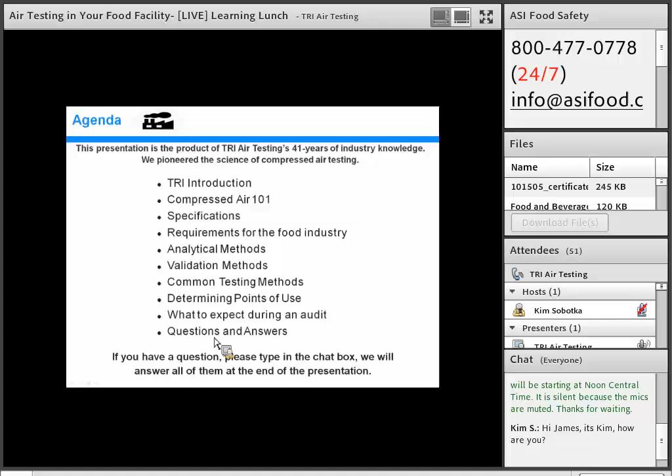So TRI has been around 41 years. There's a saying I love, it says, "Why trust the knowledge of a brickmaker about jewels?" It's from a book called The Richest Man in Babylon. Just means, you know, get advice from people who actually know what they're talking about, right? You're not going to go down to a jeweler and ask him to build you a house. You're not going to ask a brickmaker to advise you on what diamond ring to buy for your fiance, at least not if you want to end up married to her.

Same thing with air testing. There's a lot of misinformation out there, so hopefully we'll be able to plow through and kind of debunk some of that and give you guys some good guidance at which way to go.

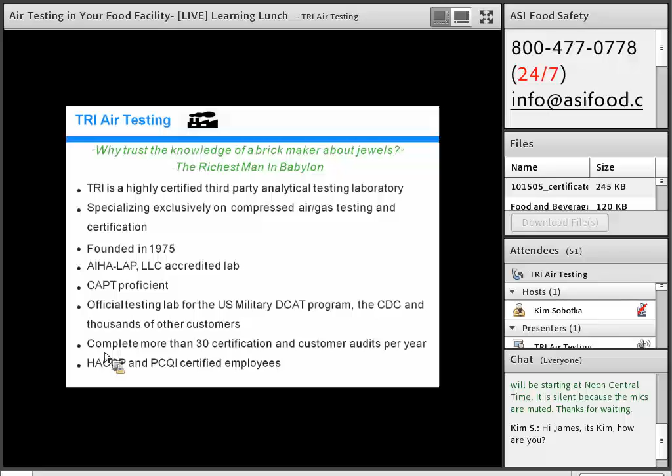The air compressor pulls in atmospheric air, mechanically compresses it, artificially increasing the pressure of it, and then pushes it out through your piping to whatever process you're doing. Typically, in the food industry, we see between 40 and 4,000 psi for operating pressures. The 4,000 is basically your blow molding, packaging, bottling type operations. Everybody else, operating pressures run between 70 and 100 psi at the point of use typically.

The one thing to really pay attention to with your air compressor is air compressors pull in atmospheric air, so wherever you locate it, that's the air that you're bringing in and putting into your process or using as an ingredient into your product. So if you have your air compressor outside and your dock guys have gotten in the habit of having big rigs parked next to it, you're now pulling all that exhaust fume into your facility and creating some issues for yourself.

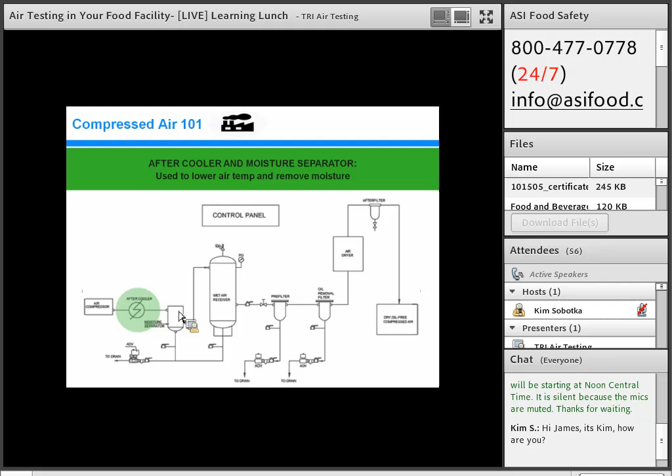So once the air is compressed, it goes into what they call an after cooler or a moisture separator. The whole purpose of these is to lower temperature and remove moisture. When air is compressed, it moves up to 100% relative humidity, and it gains a significant amount of heat, somewhere in the 400 to 500 degree range, just from the act of mechanically compressing it. A lot of the times you won't see these parts. They can be an internal part of a packaged air compressor, but all units will have them. After it leaves the separator, you go into a receiving tank.

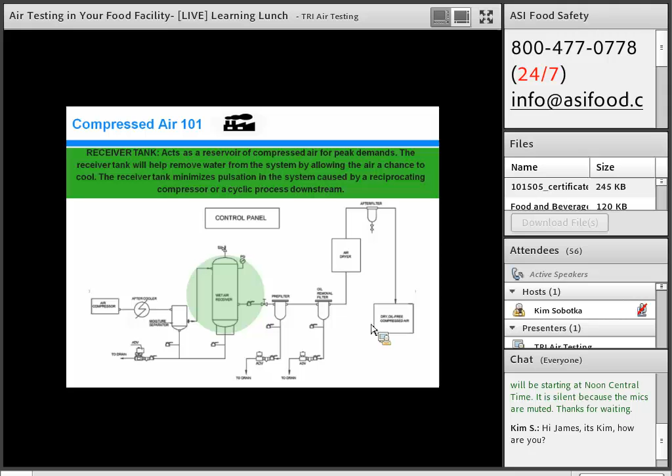Receiving tanks basically just store the air. So if you have a bump in processes, you bring 2 production lines on, we'll be able to handle that extra workflow without surging the compressor or running short and messing up the operation on the floor.

The more important parts of the system, as far as we're concerned from the food safety side, will be the next 2 steps. Filtration: the purpose is to clean and dry air to a suitable level, and it depends on the use of air. So if you're producing in a clean room, you're going to have much higher filtration. If you're using sterile air as an additive to a product, again, you're going to have much higher filtration. If you're just pushing air into the floor where you're blowing off excess product from a conveyor belt where you're also driving forklifts through, the air obviously doesn't need to be at the same standard as that sterile or clean air. So it's going to be very product and process dependent what we'll see here.

The other control that we have in compressed air systems is a dryer. There are basically 2 types of dryers, refrigerant and desiccant, that we see used in food plants. Again, the level of dryness is going to depend on the product. Our chocolate guys, where moisture is going to cause some blooming issues or setting issues, obviously want their air a lot drier. Our wet product manufacturers, your bubbling water or something as you clean produce or fish, you're not going to care nearly as much about moisture.

The big thing with moisture is it's probably the largest evil we have in food plants. If dryers quit working, we allow moisture into the piping. It's a cool, dark environment, and if there's any contaminants, it becomes a great environment for growth. So the dryer is probably one of the higher failure rates we see, and also probably one of the leading causes of contaminants being spread throughout the system.

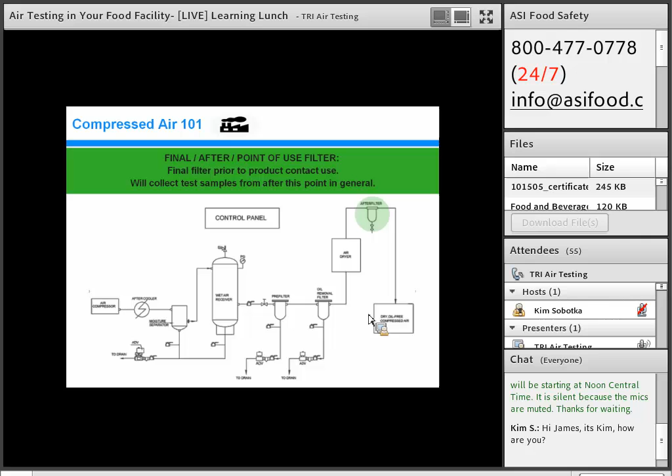If you have single multi-stage filtration that gets you to that level that's feeding one branch main trunk line, a lot of times you'll be able to get away with a single point of use, and we'll kind of get into that in a little bit. That's the basic makeup of a compressed air system.

From there, I think the important thing to understand is what regulates and what tells us how to sample and what to look for in compressed air systems. And so from the compressed air side, we have one international standard. It's called ISO 8573. And I will not read you this whole slide, but I'll kind of hit the highlights.

Basically, it's going to break compressed air out into purity classes, and it's going to identify types of contaminants: particulate, water, oil, chemical, gaseous, and of course microbiological. And then it'll give us ratings for most of those.

The important thing to note is ISO 8573 is probably the most easily found compressed air reference, but it's not carried or referenced in any food certification or food regulation at this time. The British Compressed Air Society, the BCAS, makes a recommendation based off this, but even BRC doesn't follow that recommendation completely.

The other thing to note is if you implement an ISO 8573 standard because you've been introduced to an overzealous filter or compressor salesperson, and you put that in your food safety plan, you'll obviously be accountable for testing to those limits as validations become a more in-depth part of our testing in the food industry. And that testing is much more costly than your standard compressed air testing.

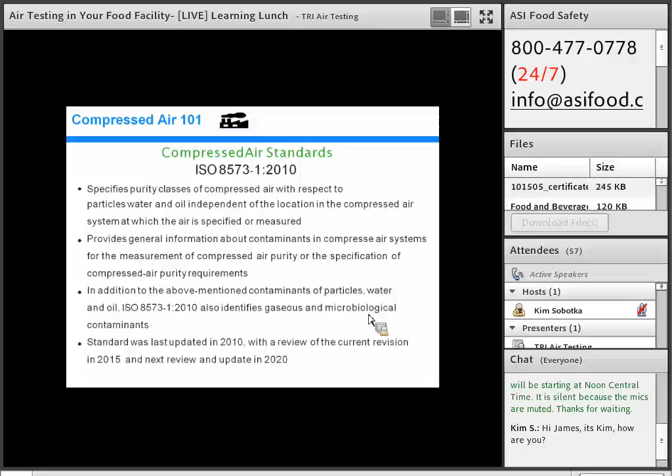Again, there is nobody out there other than a reference from the British Compressed Air Society that will tell you what level you have to hit in your facility. Once you get your baseline testing done, it's a good reference to go back to and kind of see where you fall.

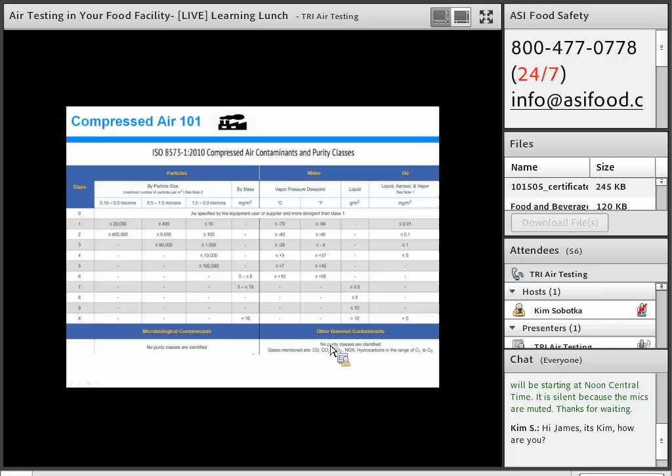The other things it will tell us how to test for and how to collect samples for is microbiological contaminants, but it has no purity classes or identification. It's not going to tell you where you need to be down to. It's going to leave all that up to us, and the same thing with gaseous components.

The other body that governs how we test and what we look for in compressed air is the CGA, the Compressed Gas Association. They are a technical association that's been around for just about 100 years now, and they are highly regarded by the U.S. and Canadian governments to the point where DOT, FDA, the Canadian equivalents of those, Department of Homeland Security, all reference their requirements and standards.

The CGA also provides test methodology that we'll follow for some sampling, but more importantly, it provides an actual hard specification for some fields. They focus primarily on breathing air. So if you're one of our people who have confined spaces, tanks that people have to get into, or rail cars, and you're feeding them breathing air, per OSHA, that should be tested under the CGA Grade D breathing air spec, but they have multiple specs all revolving around breathing air.

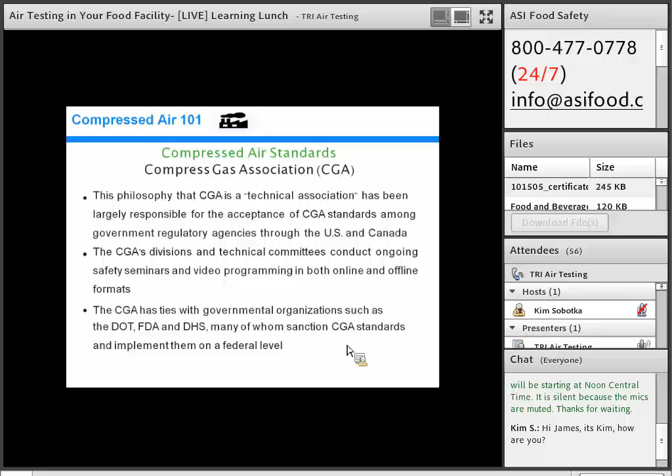For us in the food industry, now that we know kind of what the compressed air system is, how we get to figuring out what all these contaminants are and what the components are and how to measure them, it really boils down to what our certifying bodies say is best for the safety of our product and our consumers and users. So we get a ton of questions because nobody will tell anyone what they should test for.

So I guess the biggest question we end up with is, what should I test for? How do I know my air is clean? So what we went ahead and did is we created this chart here. We've taken the 3 biggest ones that we're seeing in the U.S., North America right now: SQF, BRC, and of course the FSMA code. We've built some recommendations off of our 41 plus years of experience and a ton of tests that we've had come back over the past 2 years.

We've broken that down into an indirect and a direct product contact recommendation for clients. And then we've also taken the average limits that we're seeing reported from everyone in the food industry as a whole. So it would be food, beverage, and packaging industries in the US, Canada, and Mexico primarily. And that's what this last column is. We've included the appropriate sections of the codes that we've pulled this information from and that apply.

And again, the problem is they're going to be generalized. They're not going to tell you that you have to have 1 milligram of oil or particulate in your air. They're going to tell you you need to do a risk evaluation analysis and determine the appropriate level for your facility. So it's a little bit frustrating, but hopefully the next few slides will kind of help you guys determine how to do that.

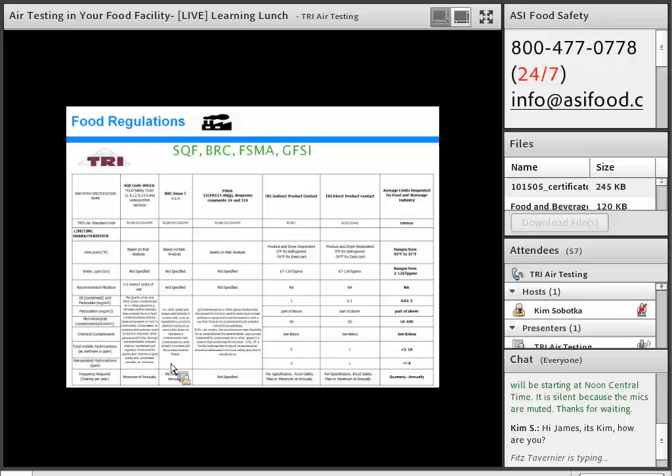And so at this point, I'm going to hand you guys over to Jason Vandagriff, our Associate Lab Director. He's going to run you through our test equipment, tell you how we collect those samples, and run you through the first couple ways to do a validation of your system.

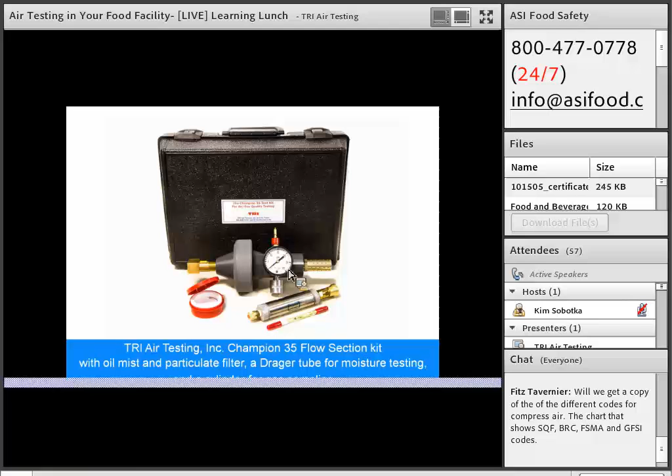Here's a picture of our Champion 35 in the field. You can see here is the gas source line coming directly into the manifold. This gentleman here is collecting his gaseous components in the metal cylinder, as I explained earlier. Also over here is the Draeger tube in action, getting our moisture data for us.

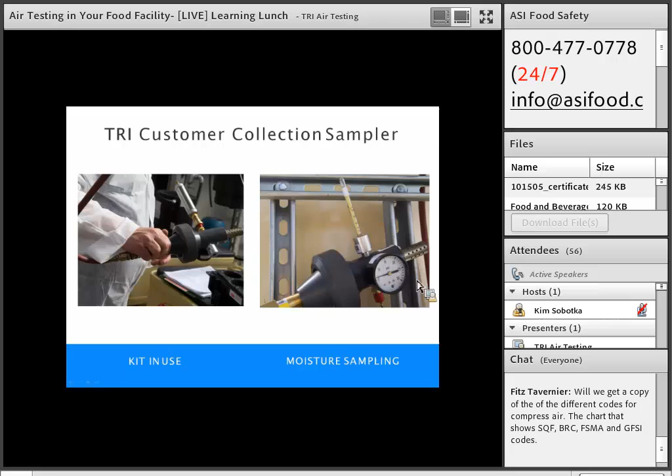I'm going to talk briefly here about some of our analytical methods. These next couple slides, we're going to talk about kind of what we see in a standard gas or air sample that comes to our lab for testing. At TRI, we test all the main 3 states of matter: gas, liquid, and solid. This slide in particular touches on the gas portion of our analysis.

Now, the gas component testing many times will not be applicable to our food and beverage customers. Many times our food and beverage customers are only concerned with moisture, microbial, and oil mist and particulate concentrations. But nonetheless, I want to touch briefly on the gaseous analytes of interest, just in case they are a critical factor that needs to be monitored in your process.

And here are the gaseous analytes that we analyze for typically. That's oxygen, nitrogen, carbon monoxide, carbon dioxide, methane, total hydrocarbons minus methane, and halogenated hydrocarbons. Our gaseous components are analyzed with a highly customized GC-FID TCD instrument. It has a dual detector, two-channel detector system.

And you can see here our total analysis time is only 37 seconds. You won't find a GC instrument in the world that can match our speed for this particular analysis. Our GC flame ion detector and thermal conductivity detector instrument is what allows us to give these 24-hour turnaround times to our customers and even same-day results if need be. This instrument is sort of what sets TRI apart from our competitors, allowing that super fast turnaround time.

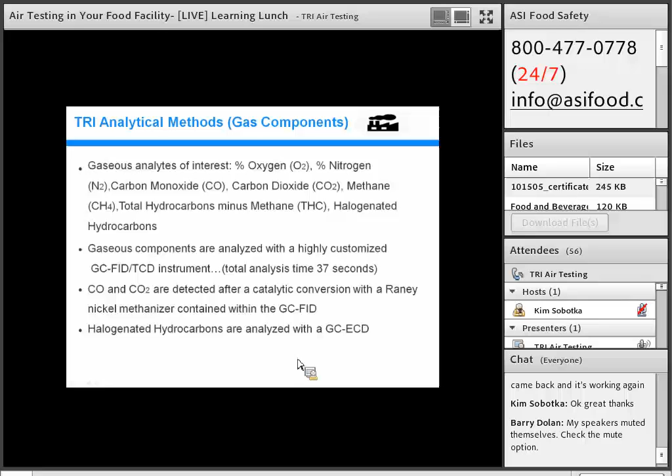The flame ion detectors can only detect compounds with a carbon-hydrogen bond, as you may or may not know. So we use a nickel bed methanizer to do a catalytic conversion of the CO and CO2 to methane to analyze those two compounds. We do offer halogenated hydrocarbon analysis as well, using an electron capture detector to analyze for those species that may or may not contain a halogen, which could be a chloride, a fluoride, or a bromide functional group on the compound structure.

Now we may move on to what may be the more critical matter that you guys are more concerned with. That would be the solid and liquid contaminants. Our oil mist and particulates are analyzed gravimetrically with an analytical balance. Our low level of quantitation for reporting is air volume dependent. The more air you pass through our sample filter, the lower our reporting limits can go down to. Some of our customers need to report as low as 0.001 milligrams per cubic meter, and we can, of course, accommodate that if need be.

Moisture is analyzed with a selenium oxide reaction inside the Draeger tube. This is done by passing 25 liters of air through the tube. If your moisture is above only 2 parts per million, a reaction will take place in the tube, and we can report anything above that 2 ppm level.

The dew point temperature is in direct correlation to the moisture content. It's a function of the water vapor pressure signature from the moisture content. We use a psychrometric conversion chart to determine the dew point at atmospheric pressure. We can also then convert that atmospheric dew point to your line pressure dew point if you need us to do that as well. Many of our customers request that.

Halogenated oil vapor and/or oil mist is analyzed by collecting this material onto a carbon tube, much the same way that we collect our moisture tube with the Draegers. We then extract that halogenated oil content off the carbon tube with a proprietary desorb solution and inject an aliquot of that onto our GC FID detector, just like we do with the gaseous components.

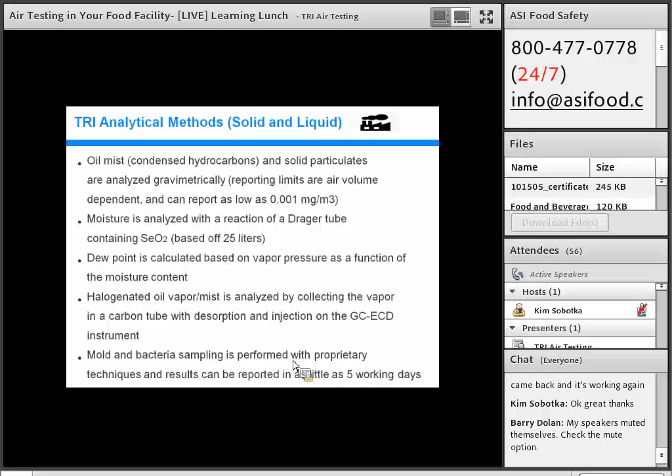Now I want to discuss briefly, before handing this back over to James, about validating the compressed gas system in your facility. This can apply to anyone that may be on this webinar. At some point you may be part of a team, or you may manage a team that has to validate a critical system for a brand new or remodeled facility, or you may buy a new critical system and it needs to be validated at purchase. So this information can of course be helpful for that.

This slide again is only going to touch briefly on this subject matter, but I did write an entire technical paper on how to execute a proper compressed gas system validation.

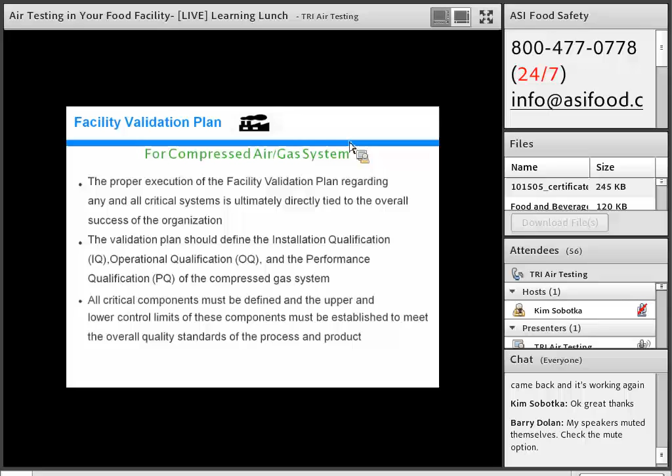that we needed to build just to be able to help you understand what you need to do in your facility. So what we're going to hit next is actually the parts that will be most applicable to you. How do you implement the knowledge of what your system is, the contaminants that are potential in it, your types of controls, filtration and dryer, and come up with a single report that you can use to validate your system, ensure safety, and use for compliance with any certifications or regulatory bodies that you're responsible for.

So there's three common test schemes that we're seeing in the food industry, and there's probably 4 or 5 other ones that could potentially be used that are used in the medical, pharmaceutical, and some of the dive breathing air type areas. But we're going to focus on what we're seeing as the general practice for the food industry.

The first type of testing scheme you can use is what we call a baseline analysis. A baseline analysis simply means you've had a system in place. It's been functioning for however many years. You've never tested your air, so now we've got to figure out where your air is at and if that meets your internal quality standards. What we'll do is send out a kit, you pull your samples, you get that initial report, and then we'll go over that data.

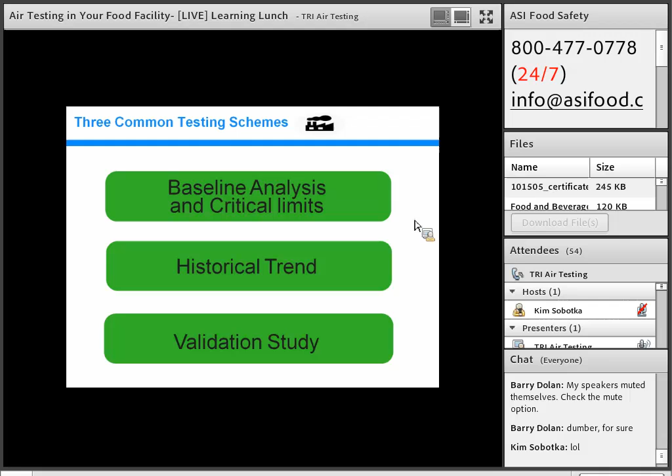One of the hardest things, and one of the conversations I have the most with customers that are coming online, is determining points of use and how to figure out where to sample in your facility. So we work a lot with quality departments who aren't on the floor all the time in the mechanical sense, where they're running the lines and doing the testing themselves.

So kind of framing this, there's 3 types of product use we've got to be aware of as far as air is concerned. You have your direct product use, which we consider basically anything that touches the food or the inside of the packaging that the food's about to touch. So if you're blowing open bags and loading it, if you're inverting bottles and blowing brittle plastic out, if you're blowing excess flour off of breads, all of that would be your direct type product contact.

The next type of point of use would be an indirect point of use. So for food facilities, this is primarily going to be our cleaning sanitation type use air. You do a clean in place, CIP, and then you come back with air and you dry it down with the air wand. The food's going to run right over that surface next time you run the production. So most people will consider it indirect product air, and we have a slightly different recommendation for that air. The third type of air used in facility plants is going to be your process air.

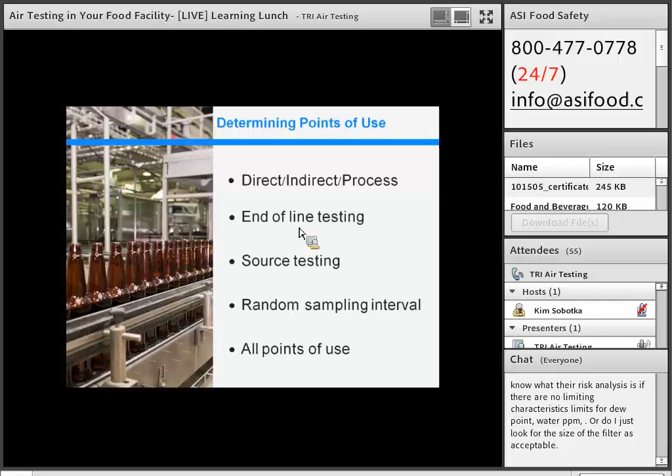So once you figure all that out and we get our testing done, you'll have your audit coming up, and what we see a lot is people don't understand how the system works, what the contaminants are, where they should have tested, what points of use they pulled from, or why they tested. And so they have all this paperwork and they get to their audit, and then the auditor starts asking them questions because that's what auditors like to do, and they don't have answers, and that's where they get themselves in trouble. So even though they tested, they're still getting hit on their audit because they didn't understand what they tested.

So there's a couple things to do to prepare yourself for an audit. The best thing to do is have paperwork always. There's a bunch of items to include in your audit, and we have a bunch of this documentation as downloads available here on the webinar. The items that we would recommend including would be your line diagram with points of use identified, some type of SOP for testing that identifies your dryer, filter, a defined testing schedule, so how frequently should we be testing, and a defined testing method.

Are we doing a trend analysis? Are we setting critical limits? Are we just doing a comparison to last year's results? And then have that SOP along with your reports from testing and a certification from the company that completed your test. So whatever analytical lab did it, they should be able to give you a certification.

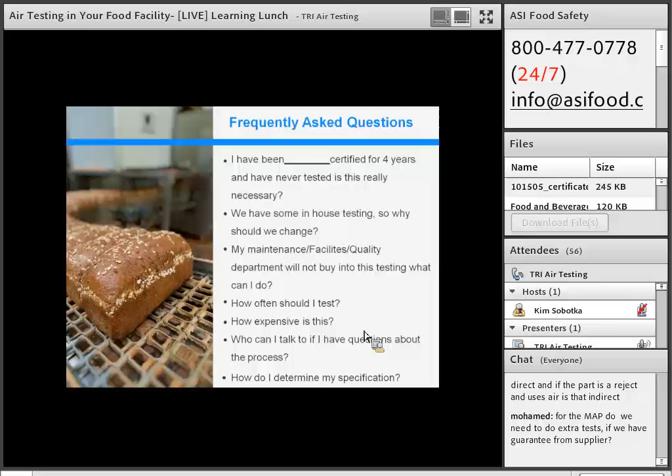All right, so at this point, I'm going to mess with my screen for a second, and then we're going to see if there's any questions that we need to answer. Give me 1 second.